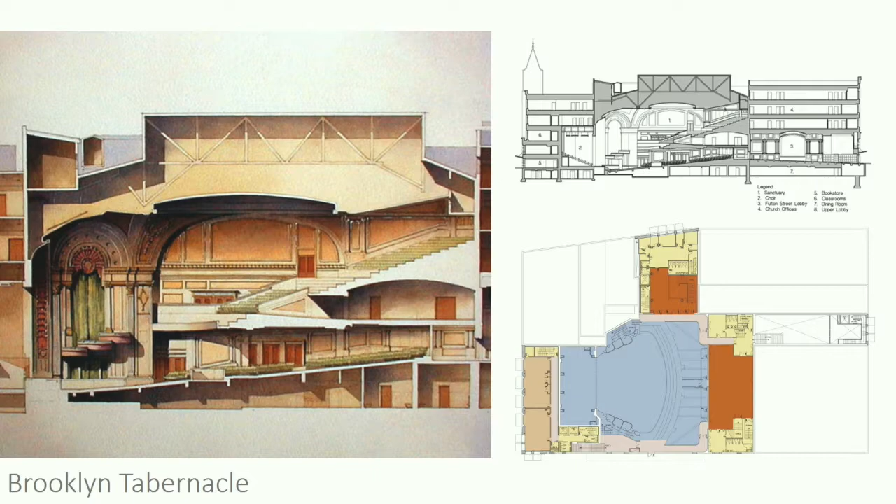And if you've ever gone to a church where you have like 2,500 people singing gospel, what happened is that the balcony started to sway. Because they were singing gospel and they're doing like this, the balcony would sway. And so we actually had to have our structural engineers go to church and put sensors in to make sure that the swaying was okay. So it's okay. But I thought that was pretty cool and something they never taught me in school to worry about. So if you do something in this gospel music and everyone sways at the same time, you may feel a rocking. How do you teach that in school?

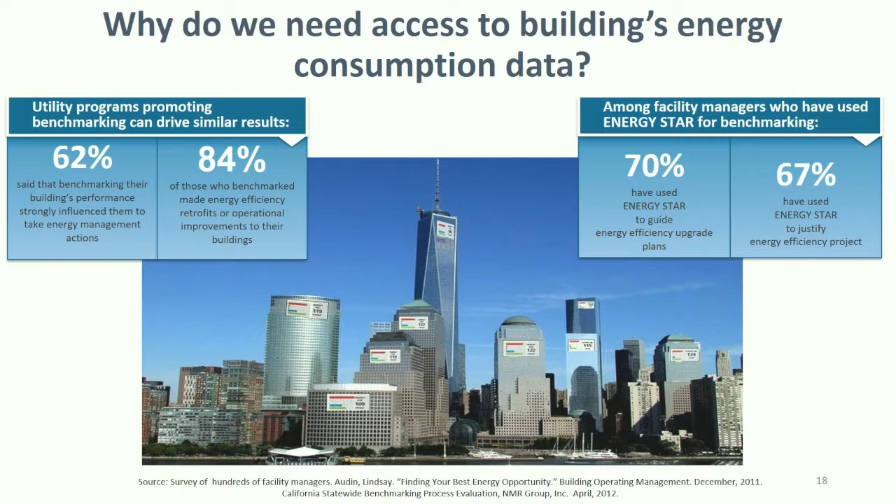But we do all this monitoring, and I thought, well, that's just the way we live. We should do something with it. So I thought, wouldn't it be cool if all your buildings had signs on them telling you how much energy they use so that you could decide where to live and where to work, right? I mean, that would be pretty bold. And so, when you look overseas, they do that.

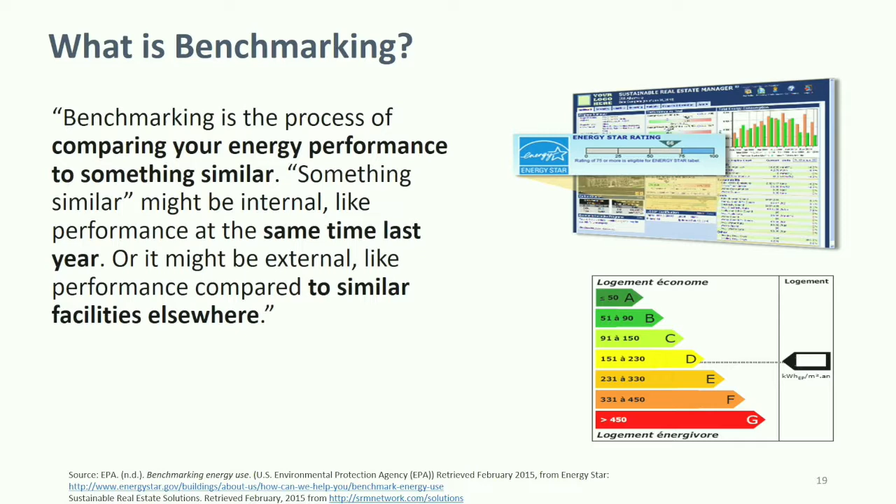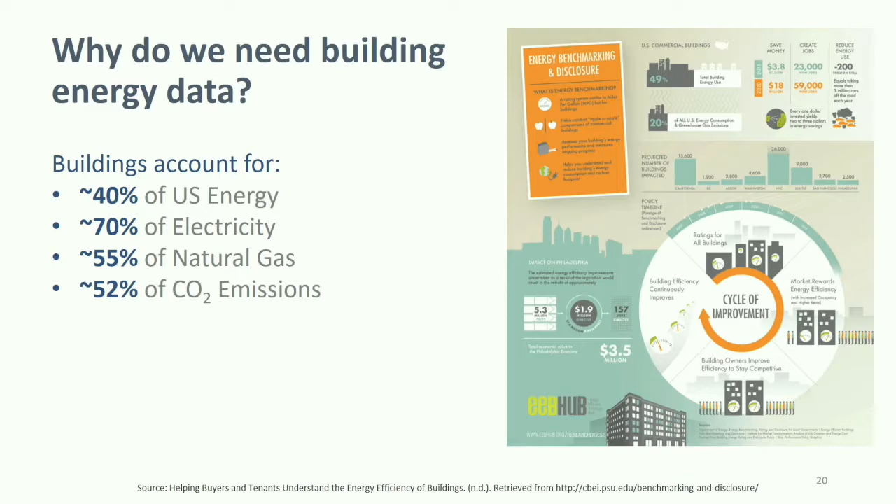And so, you're all energy guys, you know all of this. Why is energy important? We use a lot of energy for buildings, so is there something we can do to make things better, so we use less energy? Okay, so before I go into what to do with data, let's talk about how hard it is to get data sometimes. Some data is publicly available. I talked about benchmarking. That's not so easy.

So we worked for a couple of years on this project called the Energy Data Accelerator, and it was with the Department of Energy and NREL and ICF and what was then the Energy Efficient Buildings Hub, CBEI, Carnegie Mellon, Penn State, yada, yada, yada. But our goal was to figure out how do we streamline the data. Sounds easy, but not so easy.

So all of you, you live somewhere, you get that bill every month, and you see how much energy you use. But imagine if I owned a building where all of you worked, and I wanted to benchmark my building. I don't have time to call you and you and you and ask you all for your bills.

That's just way too much time. So can you just give them to me? Well, you still want your privacy. You don't want me to know how much you're using. And so how do we get over that privacy? And then once I get the bills, I don't want paper. Like, can I just get it in Excel and have it automatically go into a program? So it sounds simple, but it actually took a couple of years to figure out how to do it.

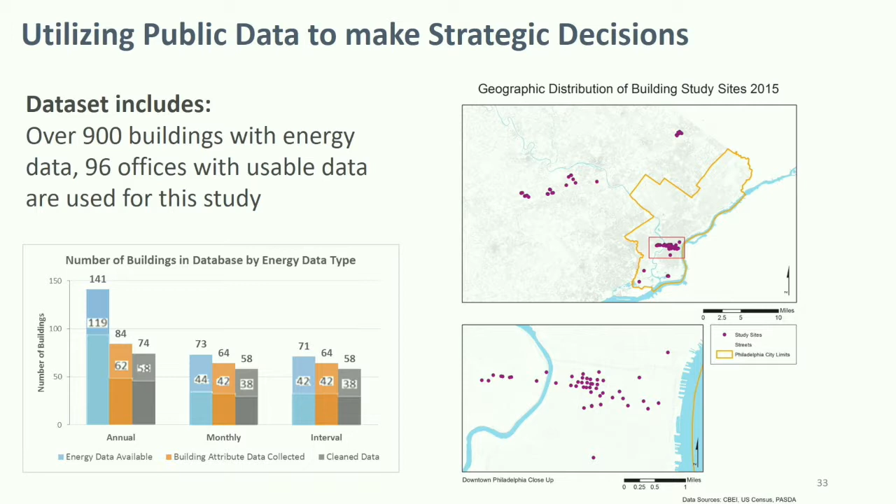So, these are some of the buildings that participated in our study, and it was important to use buildings where we actually also had their actual information and we could go visit so that we could validate that we knew what we were doing. So you could do this hypothetical test, but then you needed to check it to make sure it actually worked.

All right, so again, we looked at annual data. We looked at some buildings that gave us monthly or interval data, and the building attributes and the city profile, and we looked to see what building attributes could affect energy loads.

We started by first looking at their Energy Star scores, again, publicly available data, so we could see which buildings had bad scores and which ones had good scores. So we thought, well, that's one way to figure out which buildings need to have some work, but that tells you they are wasting energy, but not why. So let's go ahead, jump up.

So then, this is a process called lean analysis, which CMU did not invent, but our students have been using it and doing some strategic data mining to figure out how to really push as much out of lean analysis as possible.

And so what it is, you get your energy bill, and sometimes you may have your monthly data or your interval data at 10, 15 minutes, but you don't know how much was used for heating, how much was cooling, and how much base load. Because if you're going to try to figure things out, then you need to know that.

And so what we do is, in the winter, you look at the heating degree days and cooling degree days. So you look at what the temperature was on a particular time of year when the energy was used above a certain area. And then you can figure out, that spike probably came from heating. And then you can do the same thing in the summertime.

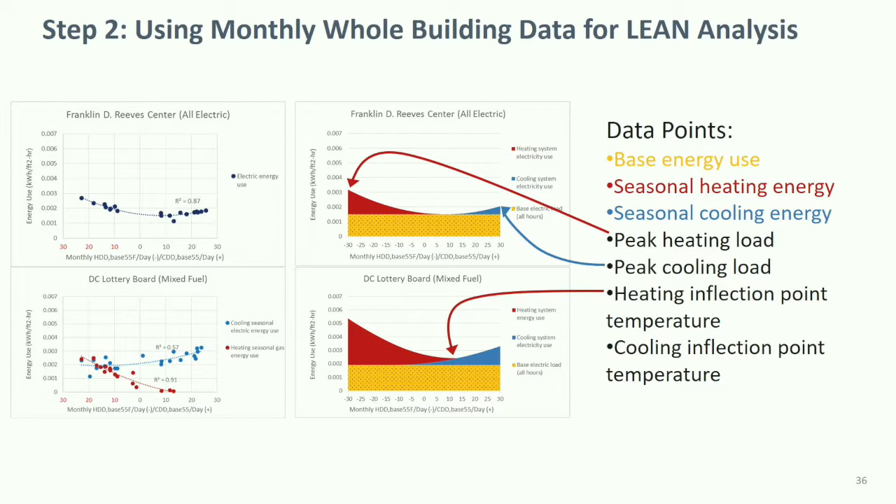Sometimes you can even zoom into bricks, and you can count the bricks on the building and figure out how tall it is or how large the windows are. You can also look and guess, like, I don't see any hinges, that window's not operable. What type of material it is.

And the part that I didn't mention is I had them in Philadelphia with me for one summer. So these are students that, we're based in Pittsburgh. And I've brought them for 3 months to Philadelphia to work on this project, to a city that they don't know, and they're driving around doing drive-bys at 2 in the morning in Philly.

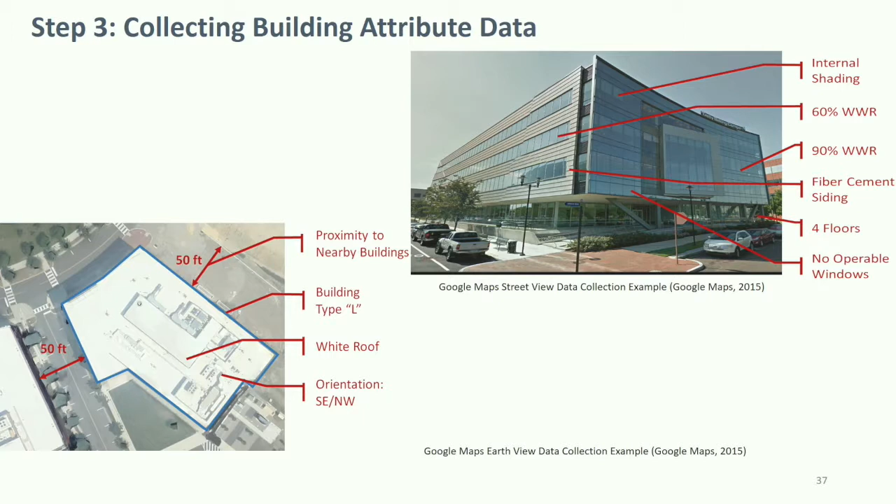But you can also measure proximity to another building. So that lets you know about shading potential cast on the building. You can look at the color of the roof, so reflectance, orientation, and the shape of the building. So these are just examples of things publicly available. And then we did a bunch of data mining to see what we could figure out.

And this is just one example of something that we already know, but we wanted to see how we could predict these things. And so one of the things was, we could use monthly data. It didn't even have to be at the interval level, to see that the buildings that didn't have thermostat setbacks definitely used a lot more. The ones with thermostat setbacks use less heating energy. And so there was a significant difference with that one.

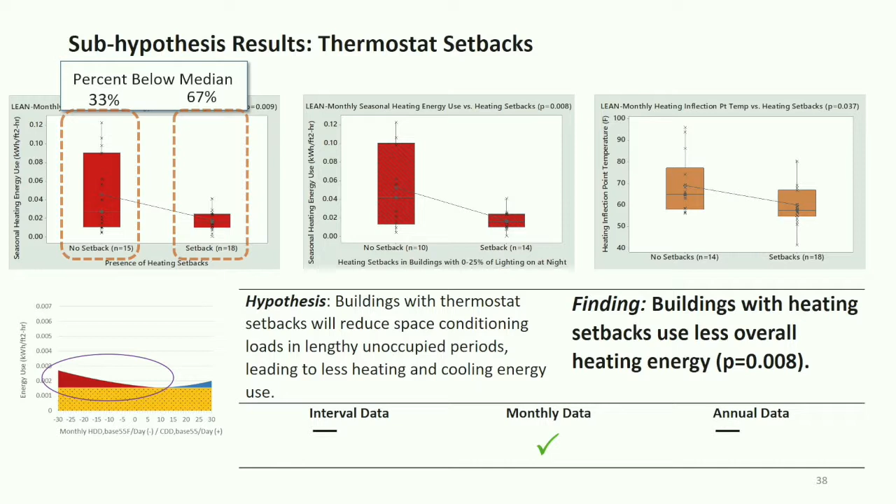So what I did is have the students just ask questions, and then we'd run the stats on it. And so they'd say, what about buildings with dark glass? Are they behaving different? What about buildings with a white roof versus a black roof? How are they behaving? So they started saying, can I tell things by the number of floors? What about how deep the building is? What if the window-to-wall ratio was different on different sides of the building?

So they started asking all these questions, and they actually were able to do predictions. So they could start to say, you know what, if a building has certain attributes, they could predict not how much energy, but whether it was going to be an energy hog or saver.

And then I had them look at what type of energy data you needed, whether you needed the annual information, monthly, or interval data. And some things are available depending on the city, depending on your relationship with the utility company, of whether you can just get how much was used in a year versus the month versus every 10, 15 minutes. So this is just one example of, hey, what happens if we just do drive-bys, Google Earth, and benchmarking? Can we make predictions?

And then we gave the recommendations to the rebate manager so that they could start to write rebates based on decisions without even having to go visit a building. So it helps save them a lot of money.

All right, now we're back to the schools. So I was talking in the hallway. New York City does these school building assessments. They go in, and an architect or engineer has to identify and rank what's happening in a building. What condition is the roof? What condition are the windows? What condition is the floor?

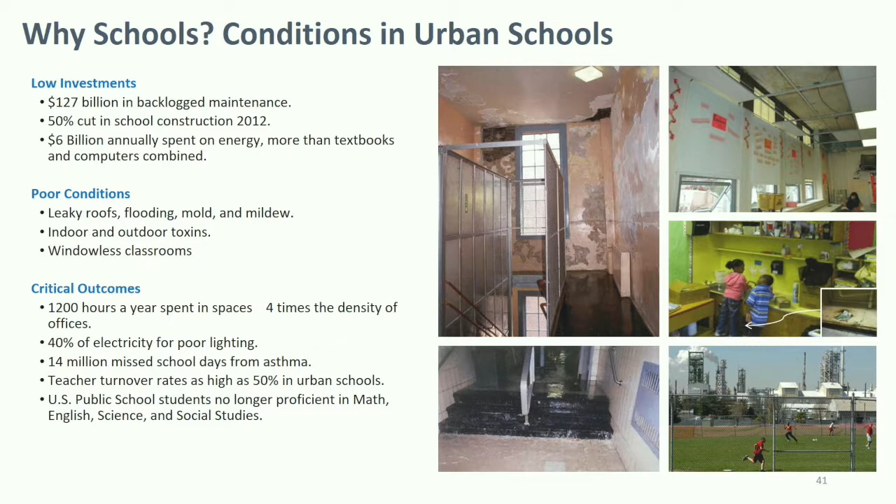And so I thought, well, you know what? Could all of this absenteeism and all these rates of asthma be affecting this outcome? When we're dealing with buildings that are 4 times as dense as offices, does any of this have any impact on test scores or health or things like that? So just as a caveat, I'm studying academic health and performance, and we know that it's impacted by a whole web of everything, and it all has an impact on each other. So I'm looking at just this one little piece of the pie to see how built environment characteristics have an impact on student academic performance and health.

So to do it, hypothesis: if we normalize for race, wealth, sex, and student-teacher ratio, because it can't be a black-white thing, can't be a rich-poor thing, and then we look at these various building features, are they going to have an impact on academic performance? This is a short list, but there was a longer list, and it was done for 125 schools. So the data set is 125 schools, 175 different attributes, testing each of these 175 things on all 125 schools to look at any outcomes. So my data set has about 8 million entry points.

And I said, okay, let's do some fun data mining. All right, but I'm only going to talk about a couple of solutions because we want to eat, right? So let's just look at a couple of things I found.

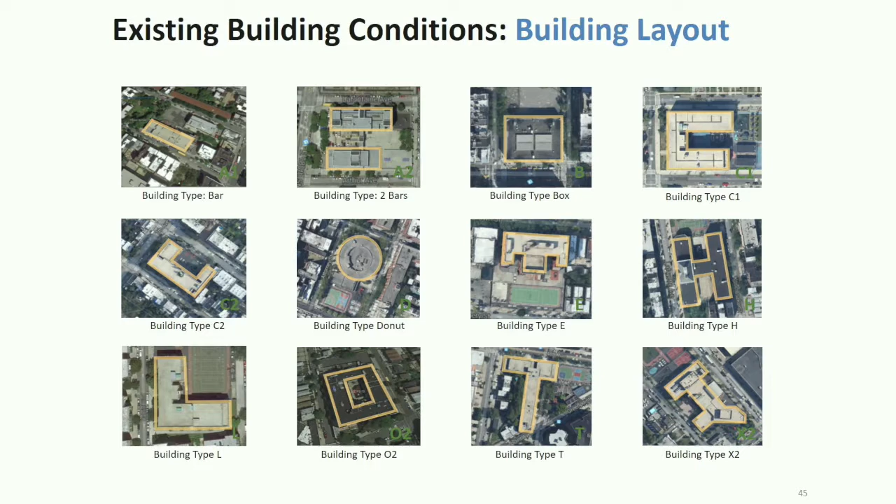All right, so building layout. What if we look at the shape of the building? Does that have any impact? So here's why the shape of the building matters. The shape of the building impacts daylight. If this is a school and your classroom is here, there's no sunlight for you. If you have a building shaped like this, you can get sunlight opportunities. Views. What view do you get if you're in here? Frankly, that view is not going to be so great because it's on a curve. Ventilation. There's no cross ventilation happening here. Here you could open the windows, cross ventilation, it feels good.

Visual oversight to enhance security. Whatever your beliefs are about whether teachers should have guns in the classroom, there's a lot of natural oversight that you can do. It's not that you're worried about the lone gunman. But if you're standing here and you're a teacher, you don't know what's happening on this side of the building because of sight lines. But with something like this, the teachers in the classroom have great sight lines of what's happening up and down their hallways. So you just get natural security just by orienting the building a certain way.

Learning clusters: you could say math is here, English is here, science is here, and form clusters of learning. No learning cluster opportunity here. And acoustical separation. Easy to separate acoustics with something like this. Acoustics are not separating here. And that's really important, especially with children, because those who have kids or siblings or who have ever babysat notice kids get distracted by anything, squirrel. So you want to be able to separate acoustics so that they're actually concentrating on what you want them to concentrate on.

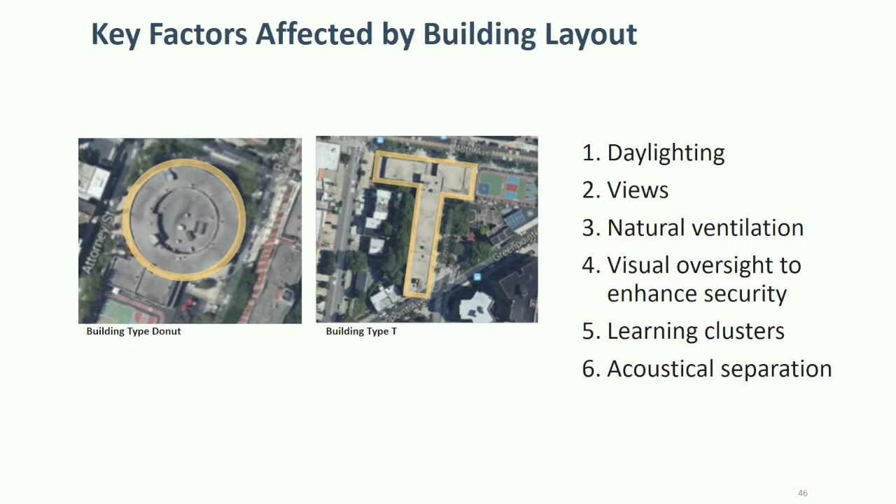So, question, does the shape of the building impact or influence student outcomes? And so, interestingly enough, all those buildings, I call them the finger buildings, the ones that have these kind of wings. It didn't matter what it was, but this is called like my weird shaped Zaha Hadid type buildings, or these big fat ones. They were the worst performers. When you check test scores, I checked absenteeism, all sorts of things. And these kind of buildings just did better. So if you are ever working on a project and you see someone trying to do something like this, no.

All right, so what about the building depth? So we talked about building depth when I was looking at how much energy it could save, but why does it matter? A building that's less than 39 feet, it's going to be a single loaded corridor. Classroom, hallway, and then there's the walls. So that classroom is just getting tons of ventilation. At this width, you're starting to get double loaded corridors, which means classroom, hallway, classroom. But you could still get light coming through if you have some windows up above.

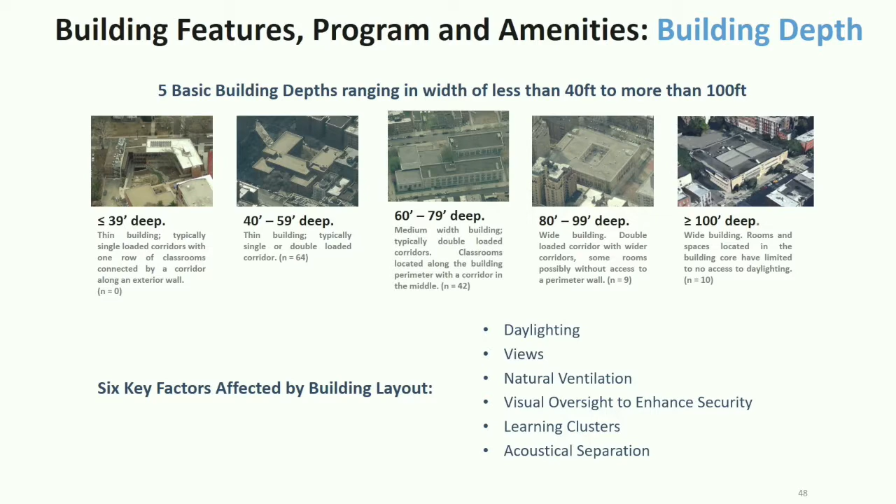Once you get to this size, see how they filled in their courtyard? There's no cross ventilation, there's nothing that's happening. So it's affecting the same things as we saw in the other building shape. The daylighting, the views, ventilation, security, learning clusters, and acoustical separation. So of course, the thinner buildings did better in English, in math, attendance, and suspension rates wasn't statistically significant, but there's definitely a noticeable drop there. So this is literally just looking at the width of the building.

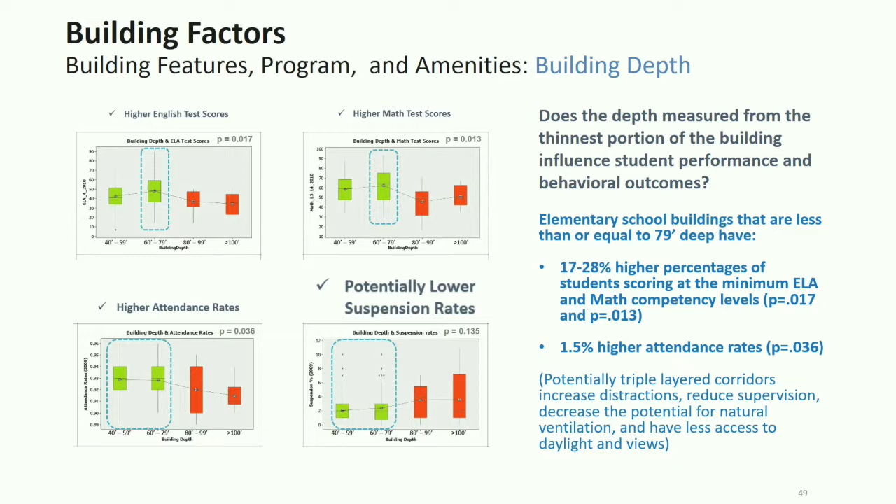Also, if you're thinking in terms of energy use, these thinner buildings are going to use less electricity because you have sunlight that can naturally light the space, because we use a lot of wasted energy on lighting that could just be free if you use the window. All right. Also important, manage your window to wall ratio. Not a good idea to put kids in a brick wall with no windows. And a little too much without proper shading also causes problems, because then you get glare and eye strain.

So, basically, what buildings did the best? Some of these old buildings from the 20s and 30s and 40s where they had these nice sized windows, just traditional architecture tended to do better than some of the crazy stuff that we think is good. I also checked for age. And the older buildings, if they were well maintained, did better than some of the newer construction ideas. I'm just leaving all that out.

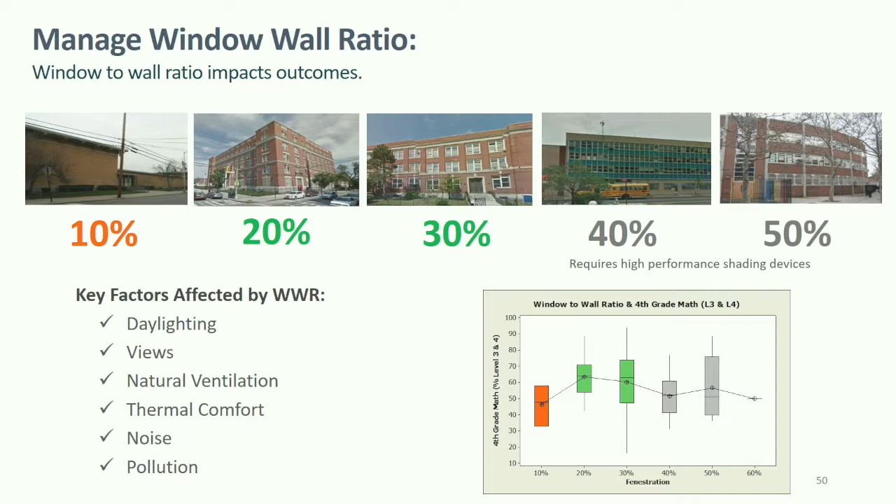So, again, things that we think are natural. Thermal comfort is a good thing. I went into this one classroom, and they kept the lights out, and it was dark, and they were like, we're trying to keep the room as cool as possible. We don't turn lights on. We don't bring in any extra heat. And I'm like, but it's dark. Well, they'll just have to look closer to the page because it's just too hot. So these are all things that are happening.

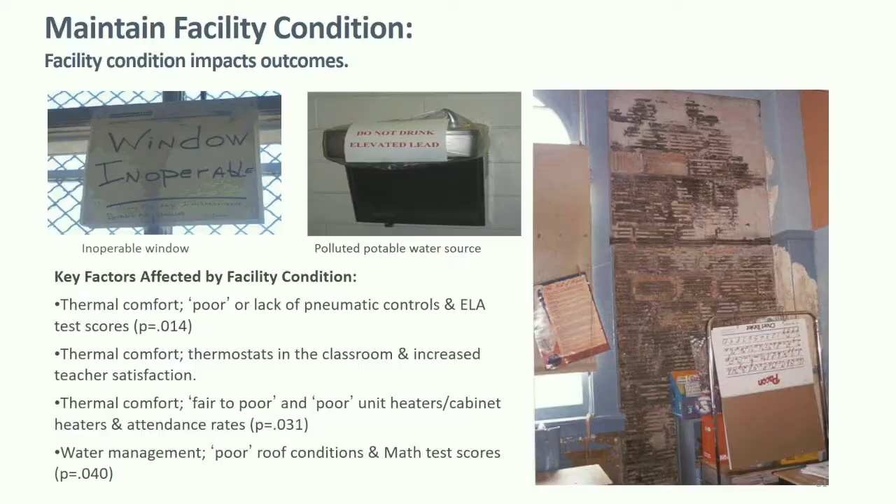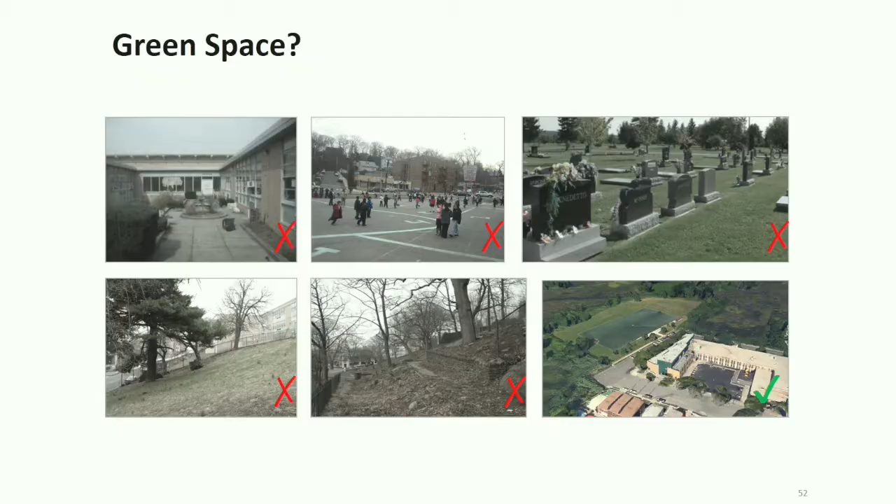Good, bad. Green space. So just to recap what a green space is: it is not when you don't have much greenery. It's not completely paved, not a graveyard, not a steep, crazy hill that the kids cannot play on, but you're saying, look at all the green space I have. It's actual space that the kids can play on. So, I don't know if any of you walk. I'm sure you do. This is Davis. Do y'all go into Google Maps to see how far the walk is?

So, I said for all of those schools, what's the actual walk to get to not just the front door, but the actual entrance to the closest park, and then adding in some extra time for crossing small streets and more time for crossing bigger streets. The reason for that is some schools do not have playgrounds. Some schools do not have gyms. Sounds crazy, but there are urban schools with no gymnasium, and they say the kids can play in the park. So I said, well, how far is the closest park? That was the importance of this exercise.

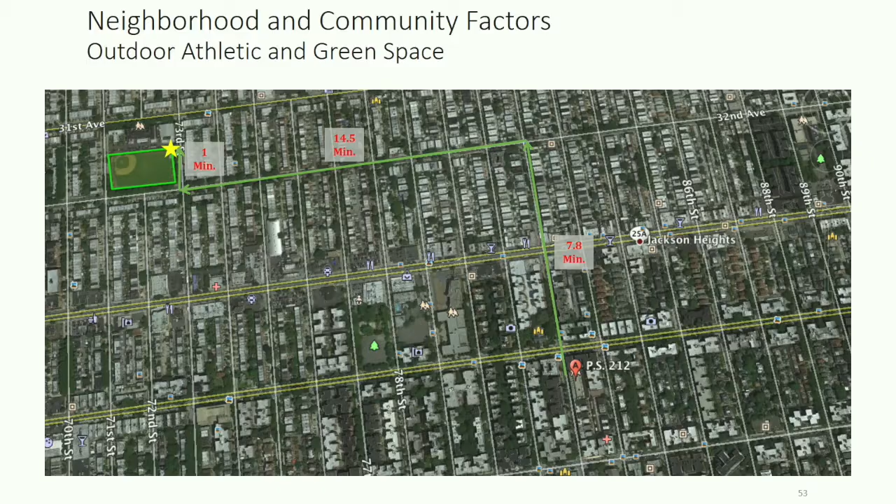So one of the things that I found was elementary schools that were greater than a 20-minute walk to the nearest 5-acre park tended to have 3% higher percentages of those who were overweight or obese. Then the elementary schools where I looked again for a 1-acre park, and that tended to be at the 5 to 10.

It had a range. I say possibly higher suspension rates because I couldn't really prove causality or anything with that, and I had no idea why, but I thought it was really interesting that this distance to the park, I expected it to affect weight. I'm not sure why it's affecting suspension. So, all

right, and then post-occupancy evaluations. Another thing that we do is if you don't have all that data, sometimes you can literally just do a survey and ask teachers how they feel so that you can make strategic decisions. We've gone into buildings and used a thermographic camera, and you can see that insulation's missing. So sometimes it's really simple, like, well, if you put insulation in the wall in between the joists, it might be warmer in your classroom.

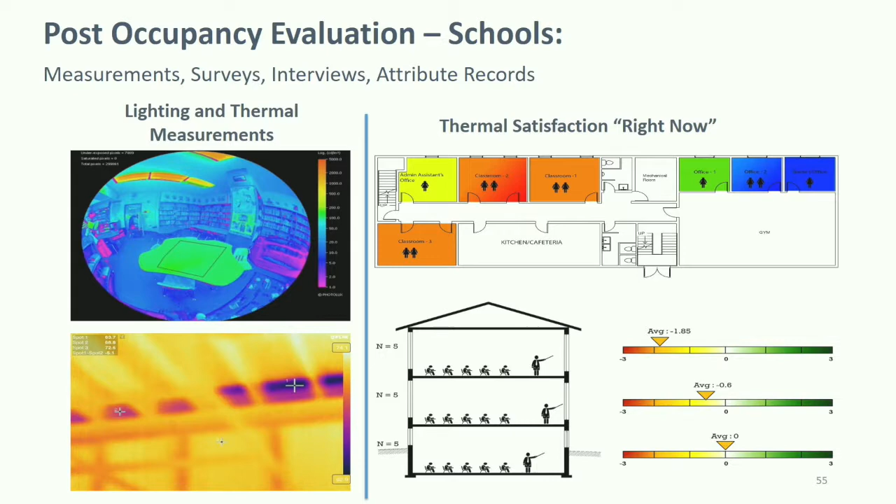We look at the glare ratios and measure how much glare is coming on the desk as well as the computer screens, and then survey the teachers about how they feel, because we've seen that this connection with glare and with your thermal comfort impacts things. So if you don't have the money to do a full-out study, just a paper survey asking the teachers how they feel and going in and doing the thermographic camera studies and checking out light levels can also help you make good decisions.

You can write to your congressman or your city sometimes and request access to the data because you're here in America, and some of it is literally just filling out a form, and they will send you the link to download the data. But so much of this is available, and we're not using it, in my opinion, enough. But we can use it to prove that these things matter.

We can use all this data to prove that wasting electricity or having these bad building designs is affecting your energy consumption. We can use all this data to say, wow, having no insulation on your walls is not only affecting your energy consumption, but it's also making your test scores lower. So instead of just living in the world where we say, I think these things matter, we can use the data, and statistics is fun, to prove that things matter, because to me, the world should live like this.